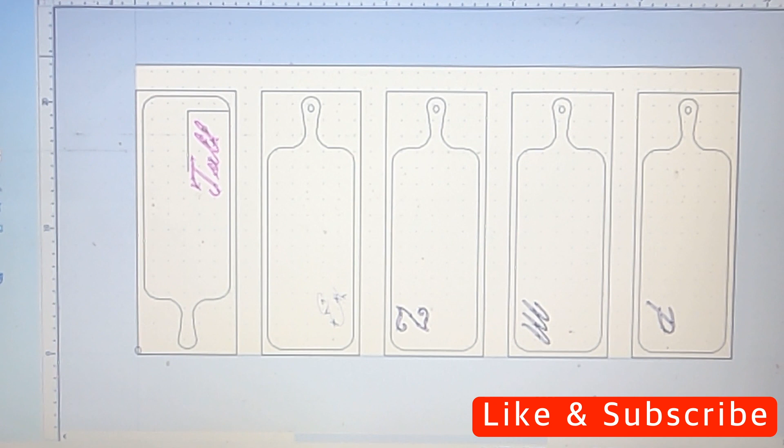If you look here, this is from a previous video, I'll have it linked down below, where I did charcuterie boards. So here's board here, here, here, here, and here, got all the different boards. Whenever I did that, I put inlays on them. I had them all cut out at once, so I didn't have to put a board down, put an inlay.

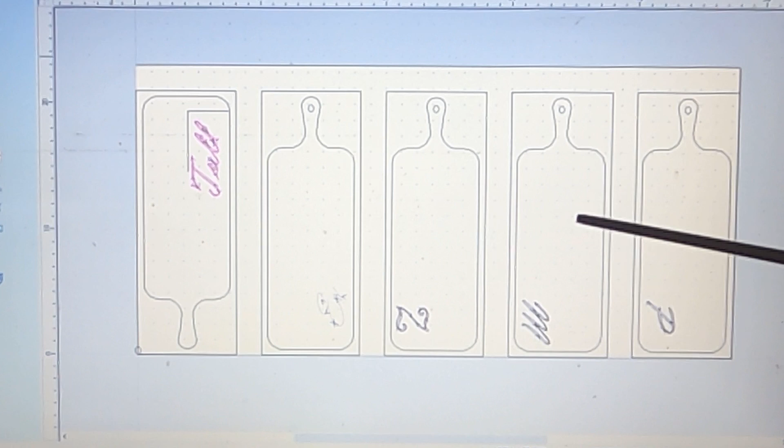So I was going to show you, hopefully quickly today, how to do this production style and how to get these out a bit quicker. Because I know a lot of people do like things customized, but you don't want to spend tons of time on it. Setting up your machine is your most time-intensive part. You want that thing to run while you're doing something else.

I'm going to walk you through the steps that I use to get a board looking like this. This is my charcuterie board here. It's got the inlay, nice flush, looks really nice and clean. Yeah, did it all at once and got it all done. So here, I'll walk you through the steps.

With this part here that we cut out, I call these the negatives, since you're cutting out the part, and the piece that we're going to inset, I call those the positives. So from here on out, I'll call them that.

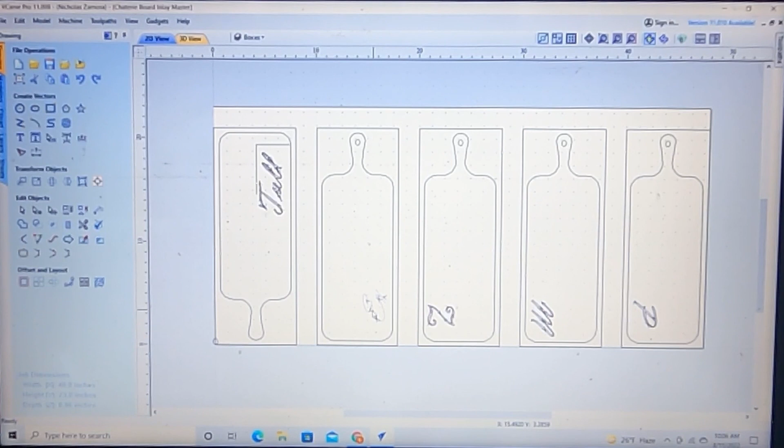Whenever we do this, I'm just going to do these first two here because I don't have all the different boards. I'm just going to show you how you do it. If I show you how to do two, you can continue on the process. This word's already done, I actually did that for one of my relatives, but I'm going to walk through how to make this part here and then make the negative next.

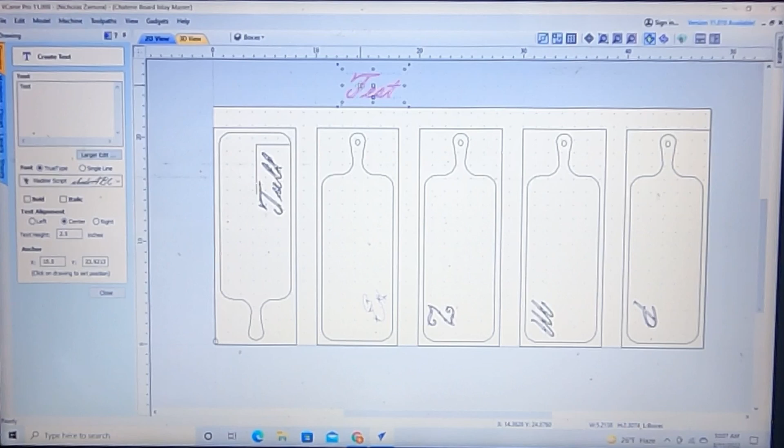First, let's go over here to the text editor and add a text box. So here we'll go to the text editor and we'll just do 'test'. What I did with these is if it was too long of a name, I just didn't put the whole thing, I just put their first letter. With this, I don't think test would be too bad, it's only 4, but once you got over 5 it was just a lot of material to eat up and clean up and everything else. So here we go, we got test, click close, zoom in.

What I like to do is connect these and not have them separate like that, but this one, I don't know if the T will connect very well, so I'll leave this one separate. But in here, you're going to have to clean these up. So if you click this, and then you click the little checkbox over here for the Vcarve mode right there, and then I'm going to search, and it's not showing anything, but we can clearly see that there's problems right here.

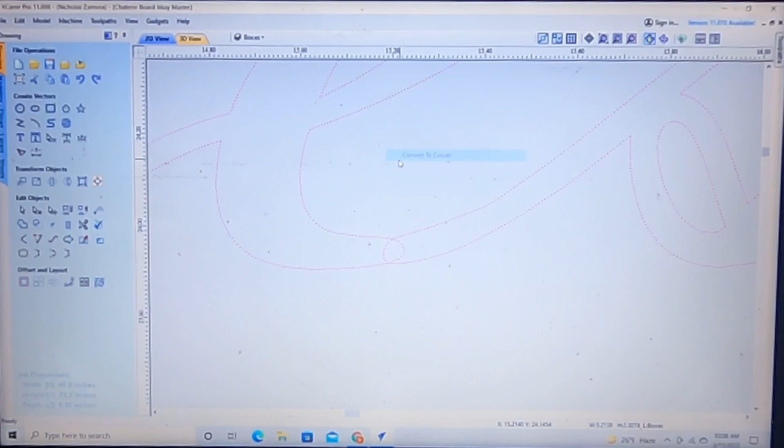First, we're going to right-click on this, convert to curves, because you cannot edit it when it's text. So before you convert it to curves, make sure that this is the right overall size that you want, width, height, and whatnot. So I'm pretty content with all that. Now we're going to come on down here, we converted it to curves, so you see how they're all different. And even the E is separated out, so this is like one line all the way across, and it doesn't even take the inner part.

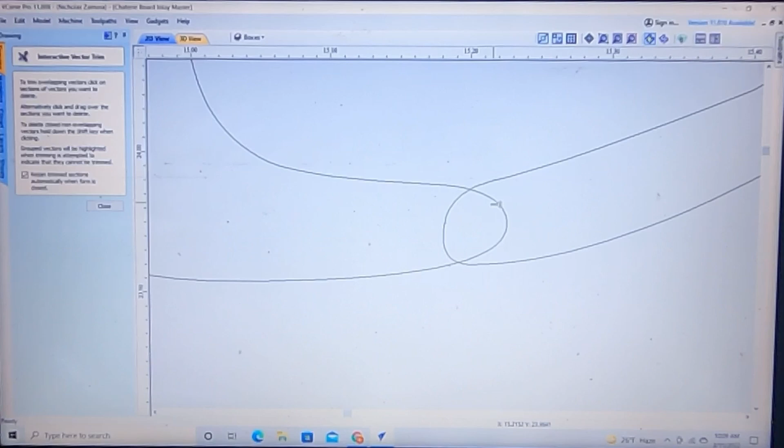So don't move anything, but go down here, then click your scissors, make sure you click the rejoin. And we can cut this. If you're too far out, sometimes it doesn't work. And then we can clean this up here too. Cut. So now they are connected, it all looks pretty good.

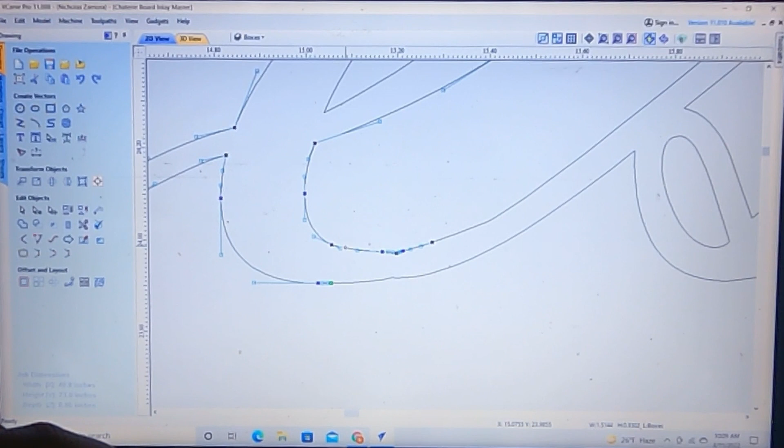However, you see that bump right there? Most people would never notice it, but it would annoy the crap out of me. So I'll get out of the scissors, then I will click on this, press N. When I press N, we go into node mode, so you see how the nodes are all right here? Then probably right about here, I'll press C as in cat. Then go over here, press C. Right about here, I'll press C. And right here, I'll press C as well. Okay, now when we press N again, it gets me out of node mode.

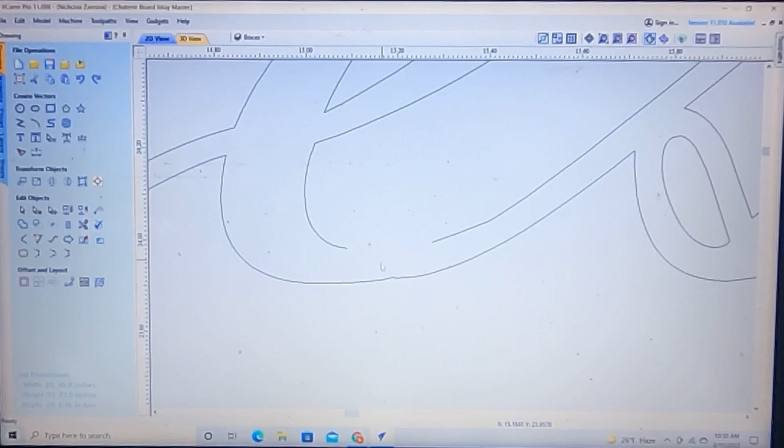Now check this out. This is all still the same, all still one piece here, but now this is a separate piece here. So now these are 3 separate pieces. Well, even more, because this one down here.

The C is for cut, so when I press delete here, I'll press delete here. Now let me highlight that, press shift. Now click this. I'll go over here on this side, and I'm going to do it with a smooth curve, and this will rejoin. That's pretty smooth. And then I'll do it again. So that smoothed that out a bit.

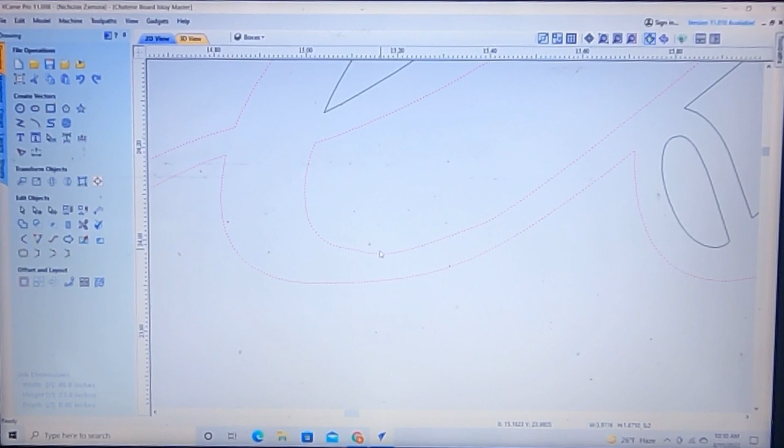It didn't do as well as I'd hoped, so I can press N again as well. Now I can grab this guy here, so this is the point of which it's pivoting from. This is the magnitude and direction. So I can move that up, and you see how it's moving that curve.

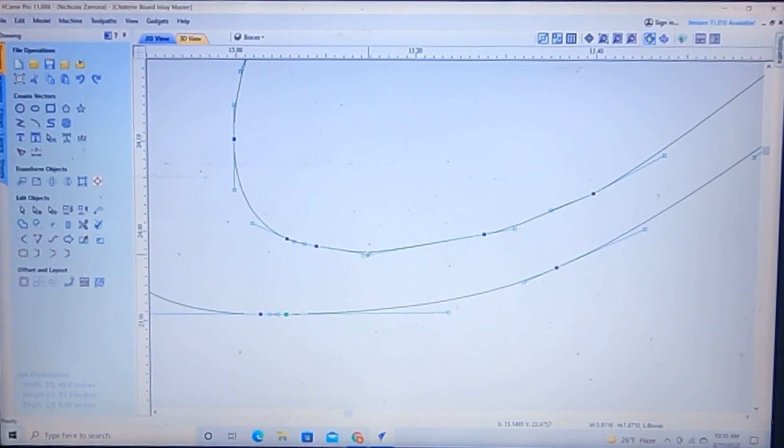I don't like this curve being too small, because the smaller it is using your V-bit, the less material is going to be there that it's cutting. So try to make that look natural, but also not too small. And then right here, if you zoom out, I might even kind of round that off.

So let's go here, press N for node mode, press C here. Oh, I was already in node mode. Press N again, press C there, press C there, press node mode again, N.

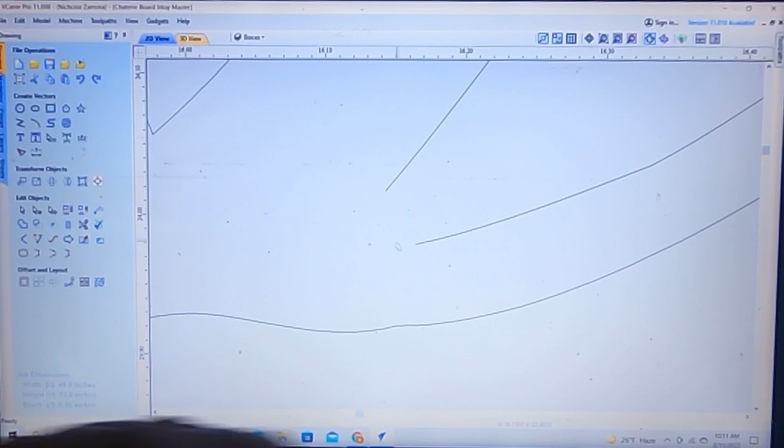We'll delete this. And then right here, we're going to click over on this side right here. We're going to close it with a smooth. So you see how that looks now? Looks a bit more natural.

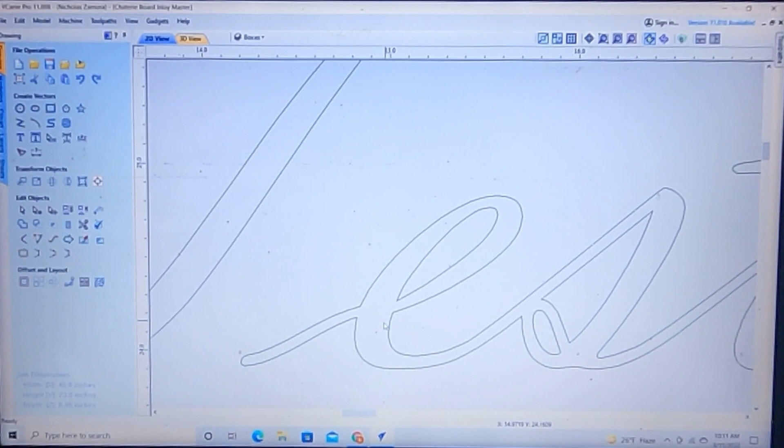This won't be a problem. It doesn't go too thin. But also if you use end mills to cut things and stuff like that, these are very handy tips to use, where you go into node mode, and then what you could do is, like, say you're using a 1/4 inch end mill, or say you're using an 1/8 inch, so 0.125.

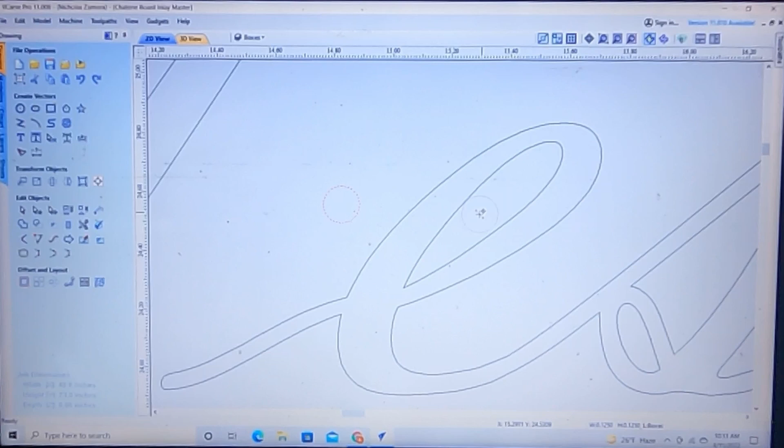See 0.125 up there is diameter. I'll click right here, that's 0.125. Then you can drag this through and see where it's actually going to cut, because it can't obviously get into that corner like this. It would only cut down to here, so you can start adjusting your letters so that it can actually cut it. So you know what's being cut, I should say.

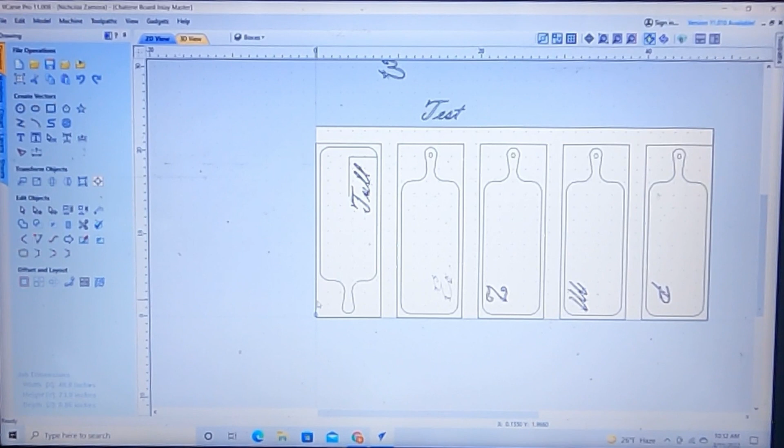Anyways, so we got this guy right. Now before we go much farther, what I do like to do is these boxes here are just representations of the blank boards I'm putting down. So I've joined boards together in the past, if you look at the previous video, and they were this size here on this outer. And then I place them, if I zoom in, see it's 0 inches right up here. And then the edge of this one's 10 inches, that one's 20 over here.

And that one starts at 30, this one starts at 40, so I am using the Journeyman. You can do this on any of them.

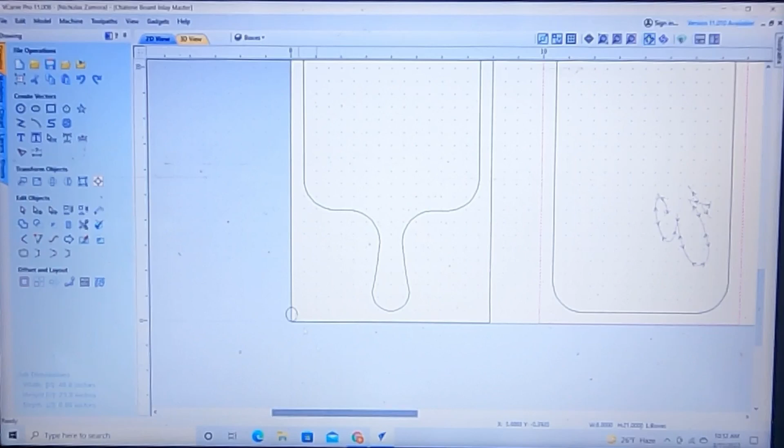But what I wanted to do is I have a strip of different colored wood on almost all of mine right here, and I wanted this to be all one color of wood, because I'm going to make this darker and this lighter here, this lighter strip that goes from there to there.

And I wanted them to all be pretty much the same in area, so I copy this in the same area, but I flipped these around mainly because it just looked better on this side, or it worked out better. So when I saw the physical boards in place, I separated these and set them up the way they needed to be. I will paste it over here, so Control V, and that pastes it.

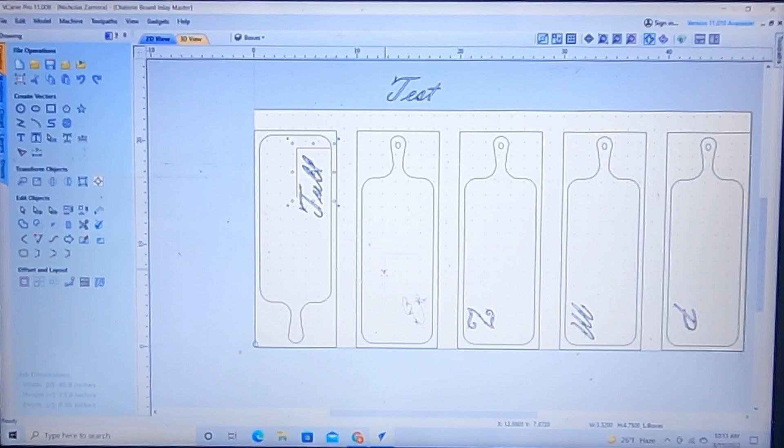We're going to move it, and this is purely for a guide. It doesn't do anything else. We're not using it for anything else. This just gives me a guide to be close to the same area as the other ones.

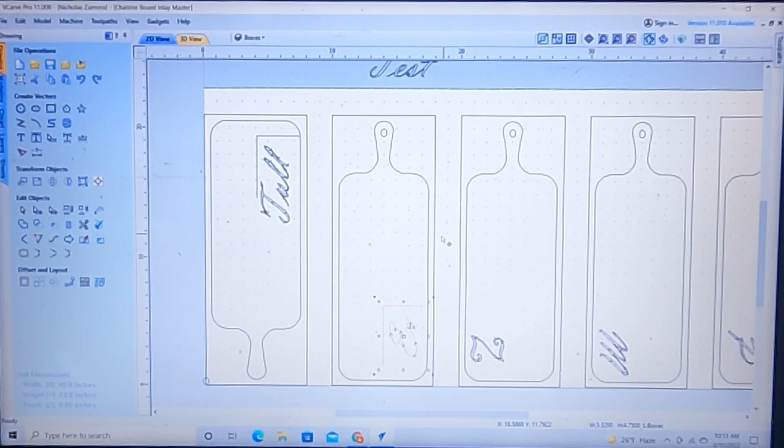I'll press the down arrow. I think my other one isn't, yeah, it's still up a bit, so that'd be good enough. It's just a little guide just to show me the general area where I should put it. That was a hangover from a different tool path I had done. I had done this video before, but I didn't like it, so I'm redoing it now.

Anyways, we're going to highlight all this, and we are going to group objects. So now when we move it, double click it, it moves all as one, and you don't have to highlight the whole thing.

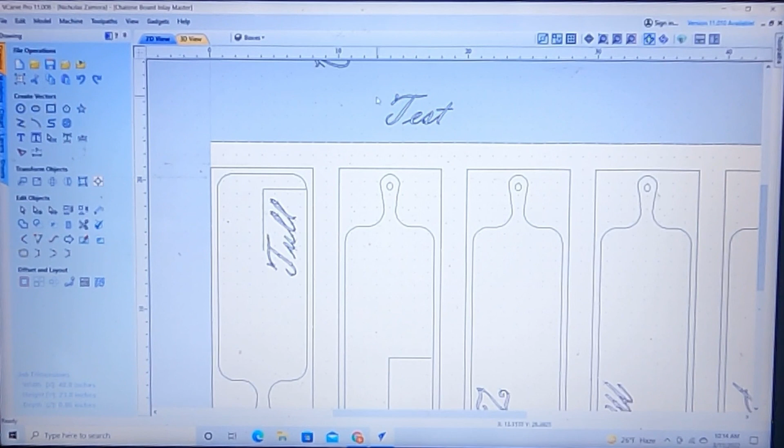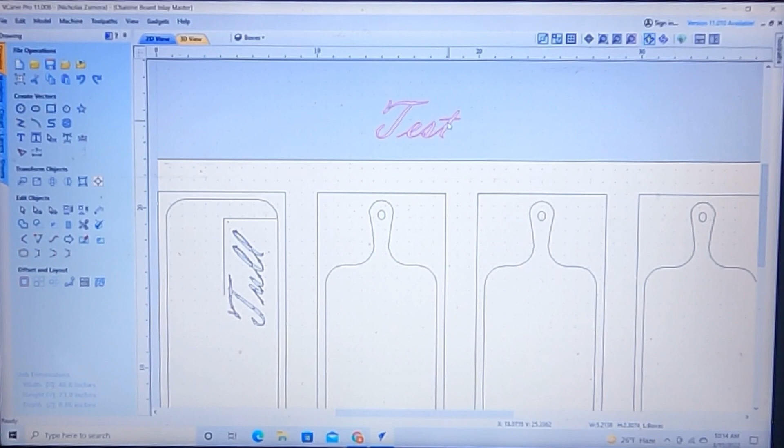Now with this guy here, make sure you got it the exact way that you want it. Any spacing, anything else you want to do, you need to do it now before you go past this step. There is a toolpath over here for inlays itself. I haven't used it. My process here has been working just fine for me, and I get full control over everything. If you want to use that, there's other videos available for that. This one is more hands-on, but you get more control over it.

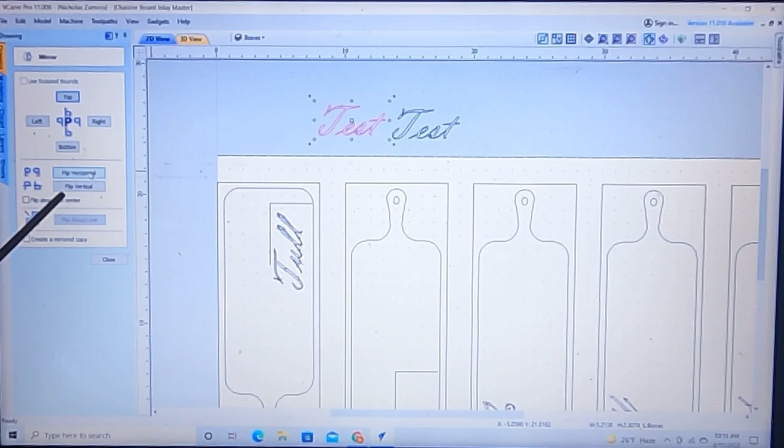So with this guy here, we're going to copy it and paste it. Now we have two of them right there. Over here, we're going to mirror the selected objects, and we need to flip them horizontal, not vertical. Horizontal right there.

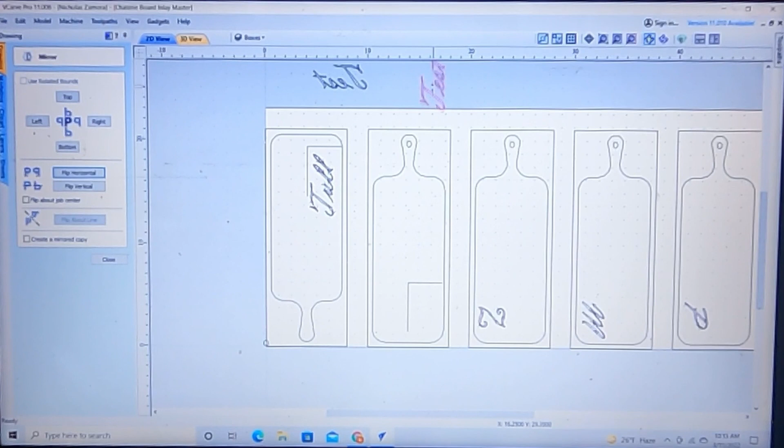Okay, now we're not going to mess around with that guy. That is going to be on our positive. So on our negative, we're going to take this guy, rotate him, and while you have this held down, if you press 9, 0, and then enter, it will move it automatically 90. You got to be holding the mouse the whole time. So you see with our guide, it gets kind of close to the edge. I don't like that because I do round the edges off. We'll move this up.

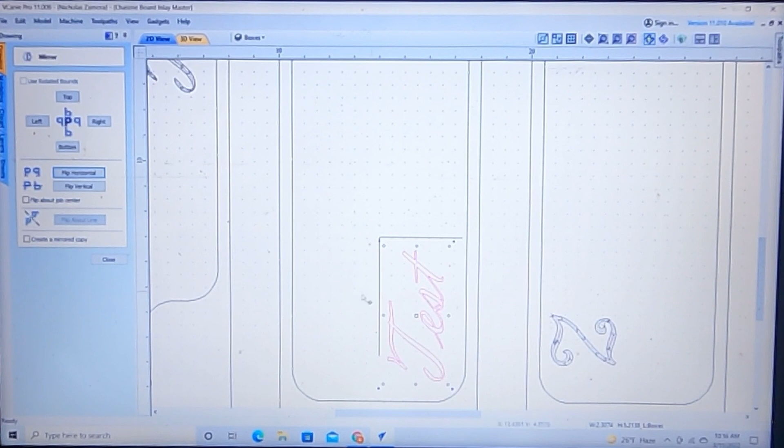And what you can do is measure your blank here and see if this is all going to line up, and make sure, like I think my other stripe starts somewhere right around here in this area. So we got the test right there. I might move it up just a hair.

So that's good. Close out of the mirror. Now with this guy, so this is my boxes right there.

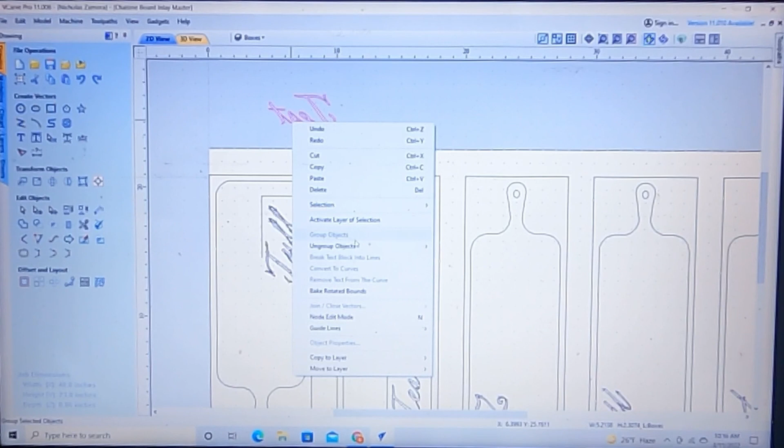I'm going to create a new layer. It's going to be the positives, P-O-S-I-T-I-V-E-S. And then the thing I really hate is if you click out, it doesn't work, so you got to click right here. I'm going to turn the light bulb off on it because I don't want to see it yet. I want to be on this layer. But with the positives, I'm going to copy to layer, positives.

And then with this one here, Control copy. I'm going to do this one as well. 90, enter. 180, enter.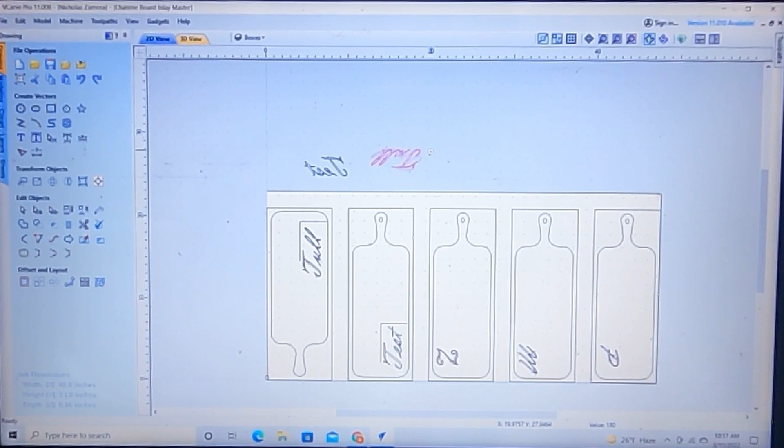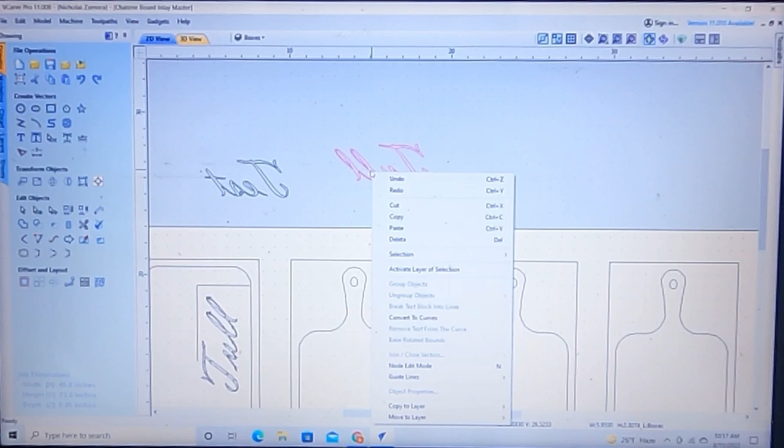So this guy here, need to do the same, flipping over. This guy here, click this, and we're going to flip it horizontal. We'll close. And actually I could just click move to the layer, but I'll just copy to layer, positives.

All right, so for the tool paths for these, I'm not going to do these ones since I won't set up boards for them, but this is the general process. If you can do 2, you can do more.

Over here I got the Vcarve toolpath, and it goes from 0 to 0.15 inches. Flat depth, you do need that. I prefer a 60-degree V-bit. The larger the degrees are, the larger your piece needs to be as far as what you're cutting out. You can use a 30, a 20, a 10 if you want. 60 seems to be good for me for most of the things that I do.

So I'm using the 60-degree, and you don't need clearance tools for this. If this was much bigger and you're using a 60, maybe. For the other tool path you will, but not for this one. So I named it Vcarve Inlay, 60-degree V-bit. I'm going to click off of those, click on this one, hold shift, click on this one, so it's only going to cut these 2. And I'll go to calculate.

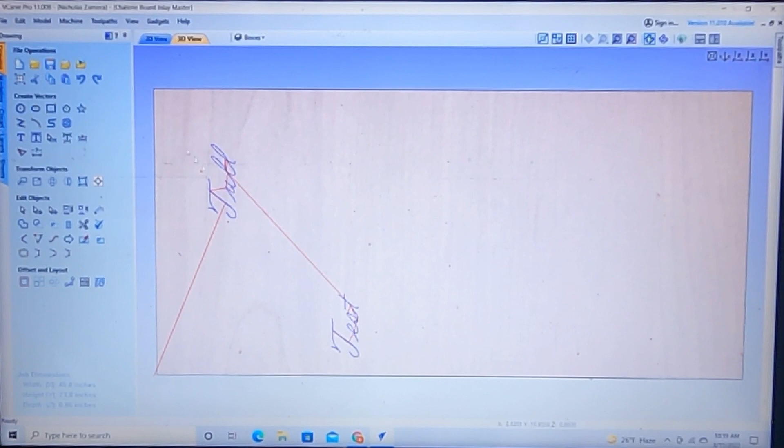So it shows the 2 names there. See, the program doesn't know, it just thinks this is all one board. Over here, I just put these boxes in there, the program has no idea. So as long as you follow this when you set everything up, you'll be just fine. It will go to the right spot. You zero down here, put your boards on there on those markings, and then run it.

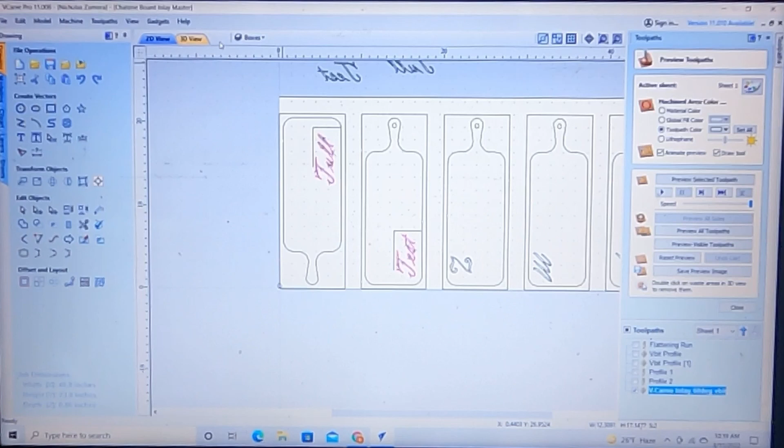So we got our first tool path for the 60-degree V-bit. Ignore these other ones here. Now we're going to go to the positives. Light that one up, turn that off. So now we're only looking at positives and what is in positives. I'll get rid of this tool path so we don't see it. So for these 2 guys here, we need to cut out the part that is going to be inlaid.

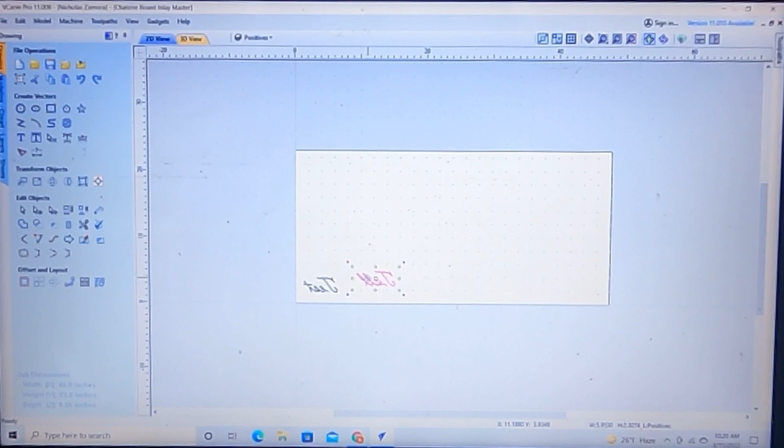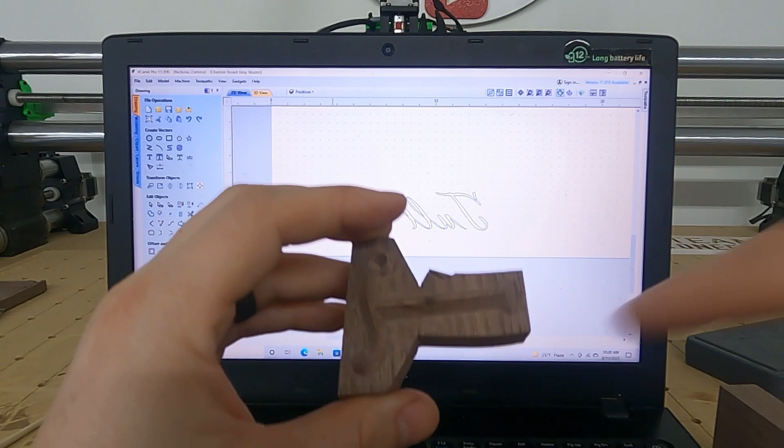I'm going to turn on the light here for a second and we'll measure the actual donor board we're going to use for this. If you go to a hardwood supplier, you're going to get a piece of wood like this, usually 8/4, maybe more. Now if you cut an inlay out of it, you can, but the only usable part is up here, and then once you're done there'll still be this all sitting there plus all this wood, and I don't like to waste all of that. There's many ways to skin this cat.

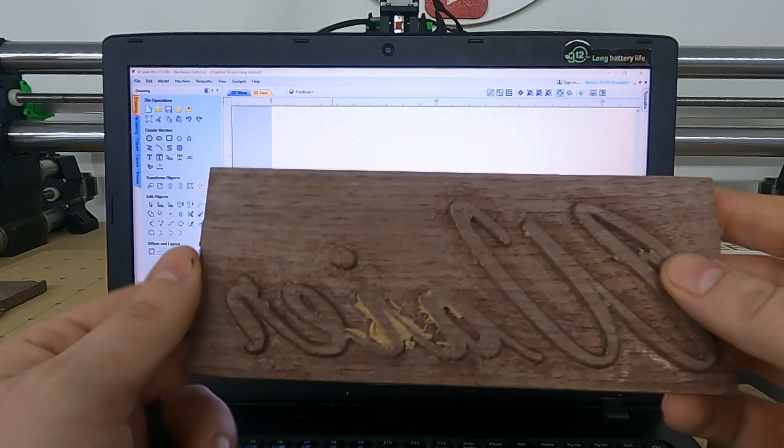It'll end up looking like this when it's all cut off, so here's another board I did. And then when I cut it flat, that was the part still sticking out, so this was set on the board, it's cut. So that's not much waste, but when you look at this, from there to there, look how much extra you got.

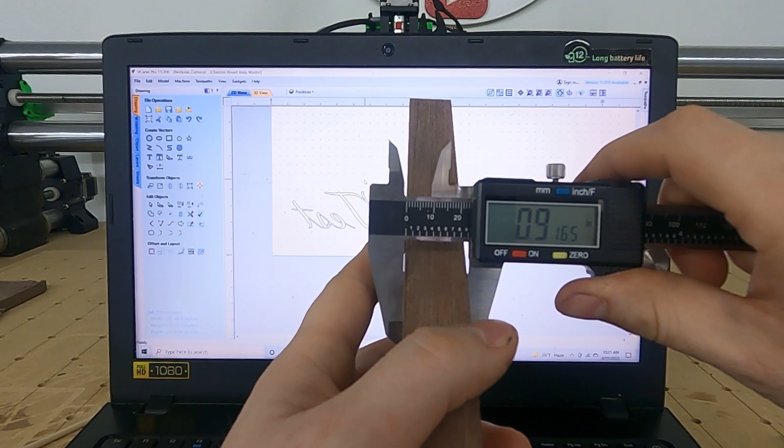What I found is I can make this go twice as far if I take this size board right here, which is 4/4, a little over. They vary whenever you get them from a hardwood supplier. You're paying for 1 inch thick no matter what, it's just they pre-planed it for you or whatnot.

And then what I will do is cut it in half like so, and then I can get twice as many out of it. So this guy right here, if I go much thinner than this, it doesn't work too well. So it works out great having it in half.

So we're at almost 4.8, 0.48, 0.49. So I'll use that. Well, this piece of board here, we need to model in here and then cut these out of it.

Okay, with this board here, the area is 10 3/4 by 3 3/4, roundabout. I'm not going to go close to the edges, so let's go over here, create a box. 10.75 by 3.75.

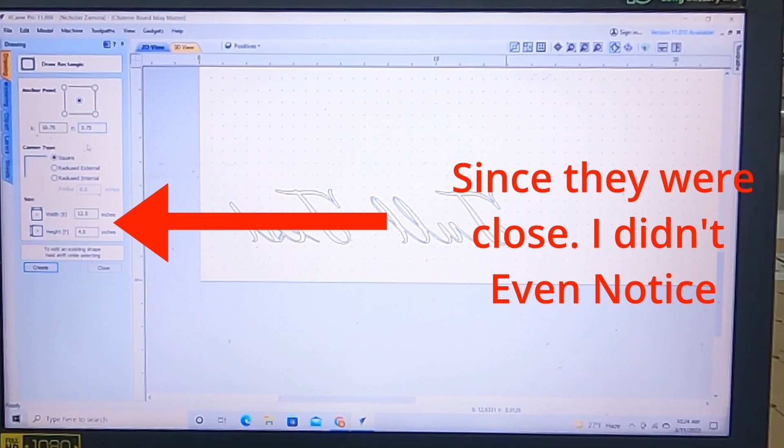So this box here is only for a guide as well. The program has no idea about it, I'm not going to really use it for too much. I'll show you what it will end up doing. But if you notice, there was a screw hole in the top left and in the bottom right, depending on which way I put this.

But the other part is with these pieces, you need to make sure they're completely flat. Definitely do that. Do not change the scale or anything like that with these, or you're going to be in deep trouble. This is also with the grain pattern, so we know the grain is going to be going this way. If you want to do anything, you spin these around to get the grain patterns that you want. So now's the time to do it.

You can get these kind of close to each other too, but not too close. So like that, I'll move this guy over a little bit.

So when we set up this toolpath to carve out our positive for the inlay, you need some sort of bounds. It's the exact opposite of a V-carve. With a V-carve, the V-bit just chills out right inside here, nothing else happens. With this part, it's going to use a clearing tool to clear out all this good stuff here, and then right on the edges it's going to use a V-bit.

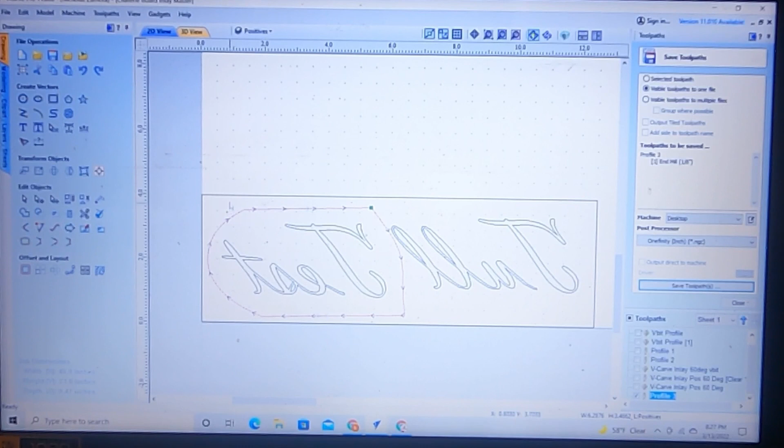You have to have some sort of bounds or else it's going to just go on forever. We could use this donor piece of material bounds here, which I screwed up earlier, and you'll see that it didn't exactly work out, so I ended up just cutting this test piece here. But you need some sort of a bounds.

Usually what I'll do is select like this here and then do an offset, like 0.75 inches, and offset it. That can work. Control Z. There's many ways to skin this cat.

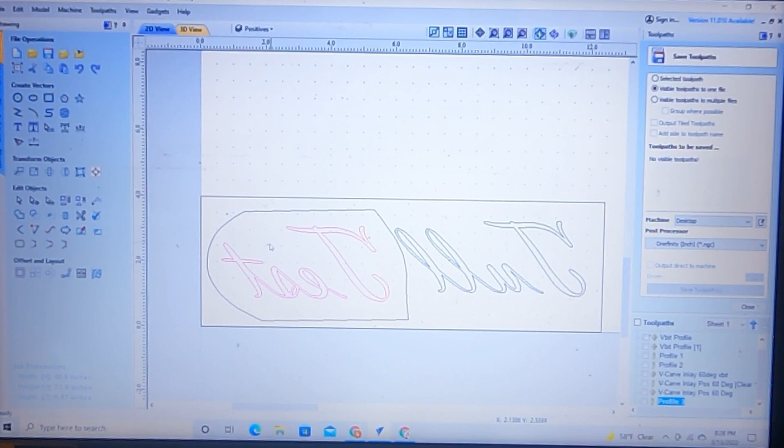The thing you don't want to do is come too close, like over here. Right there is going to be a screw, and sometimes people put a screw here and here too. So what you don't want to do is end up hitting those.

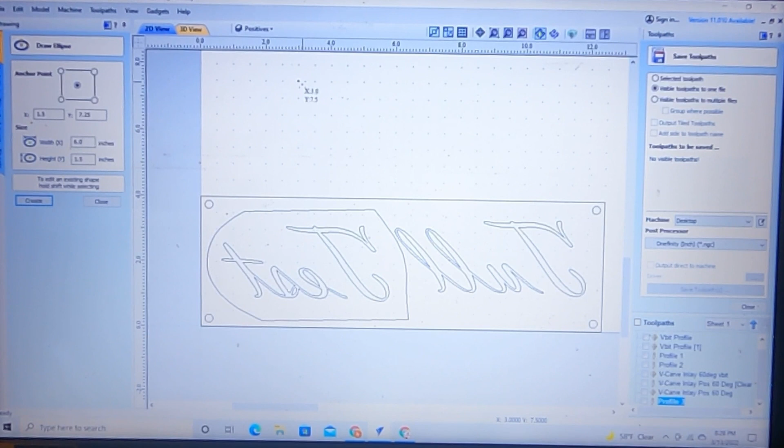So draw some sort of a shape to give you a full bounds, and that's a whole bounds there. To do it in a regular shape like that, you can do something like an oval, drawn here, and then put like a line. So you want to make it as efficient as possible.

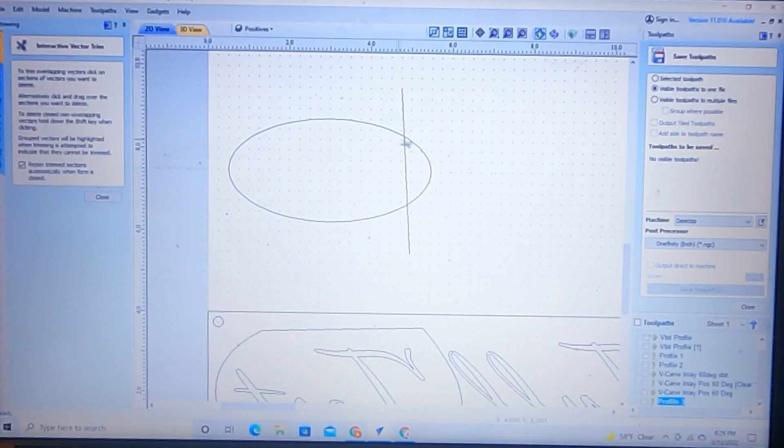Press spacebar, come over here, click the scissors, make sure this is clicked right here. It says rejoin trim sections automatically when it's closed, so basically it'll make it all complete. So click this and this and this. If you check that out, see it all lit up at once, meaning it's all one piece, it's all one vector. You can do anything like that that you want to do.

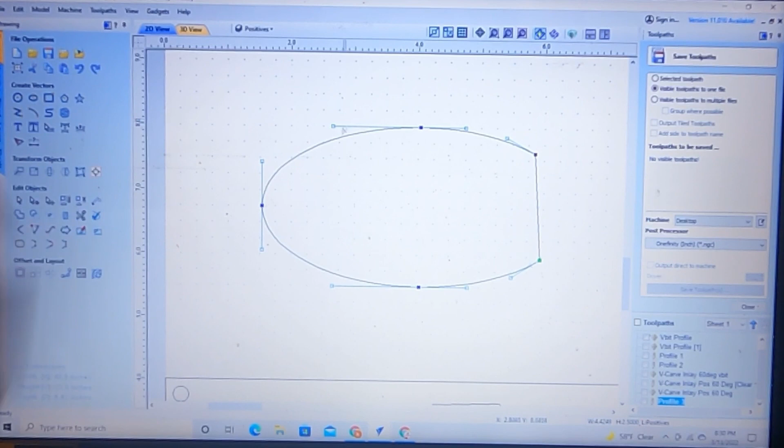Another technique I like to use sometimes is to click on there, press N for node, and then press C for cut, C for cut, and then get out of that, escape, then delete that, say you had something hanging out up there.

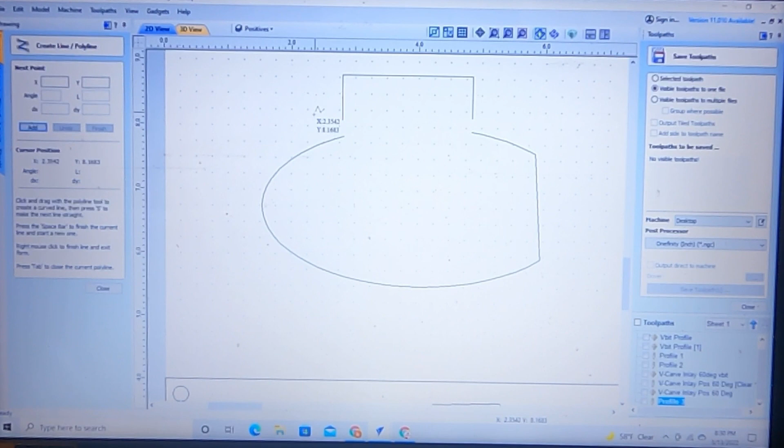You could put a line here, a line there around it, and there. You don't want to come too close to it, and I'll show you why. Click that, hold shift, then click a straight line. Over here on the straight side, you can do straight or curved, and now you see it's all one piece, clicked it twice.

So you can do that. That's how I came up with this shape here, something like that. I just don't want to come up too close to these.

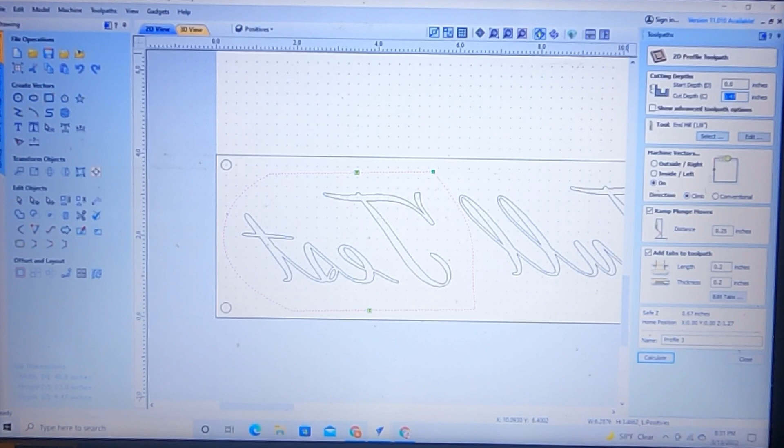Once you're done, you'll see that I made another toolpath, and I used a profile toolpath. Then make sure the cut depth, I'll put Z equals, and it automatically takes it from your model position and where it says your depth of material, it'll put it right there. Then you want to ramp your plunge moves, add tabs, calculate.

So in here, to make the inlay - let's not look at the profile - you see how that's all lit up there? We got a clear and we got a regular inlay, just the regular V-bit. So we'll go into this guy and I'll show you how I made it.

With this guy here, what you're going to do is set it to 0.1 up here, and then 0.1 flat depth, 60-degree V-bit. Whatever V-bit you used previously, you need to have it selected here.

With this path especially, you're going to need a clearance tool because you don't want your V-bit to clear out literally everything. I use an 1/8 inch end mill because it can get in real close in here. And then ramp them.

Usually your bit's diameter works. I just do 1/4 inch because it doesn't take that much longer.

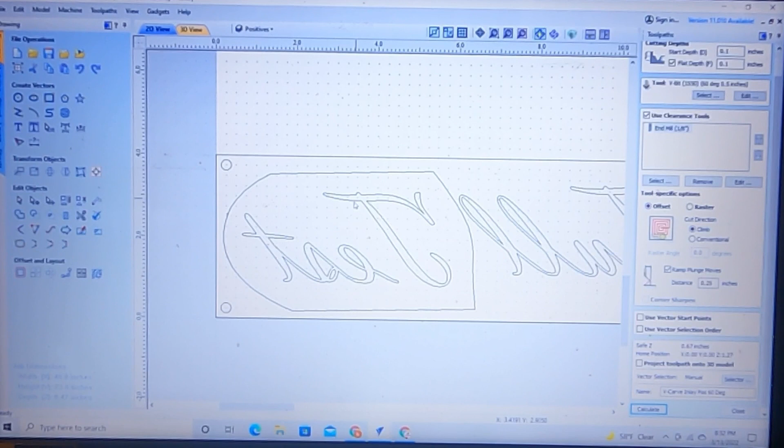What you need to do is select this guy and this, and what you'll notice later on when you see the video of this actually being cut out, I made this box incorrectly, so the box is really coming to here, so I end up really only cutting this guy out - so you kind of see into the future. A big old screw up I made.

So anyways, select those two, and then you click calculate, and also name it. So: Vcarve Inlay, positive 60-degree V-bit. And I'll click calculate.

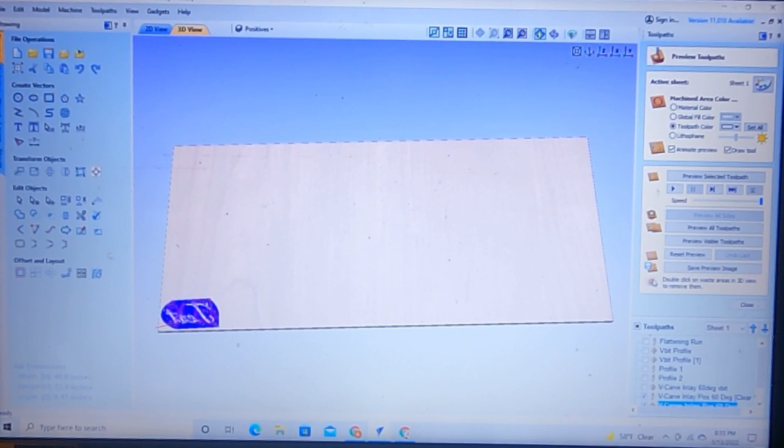So if we look at this guy over here, you can see, if we look at these toolpaths, let's get rid of the V-bit itself - see, the 1/8 inch end mill will do all of this. The bigger you make this, the more time it's going to take.

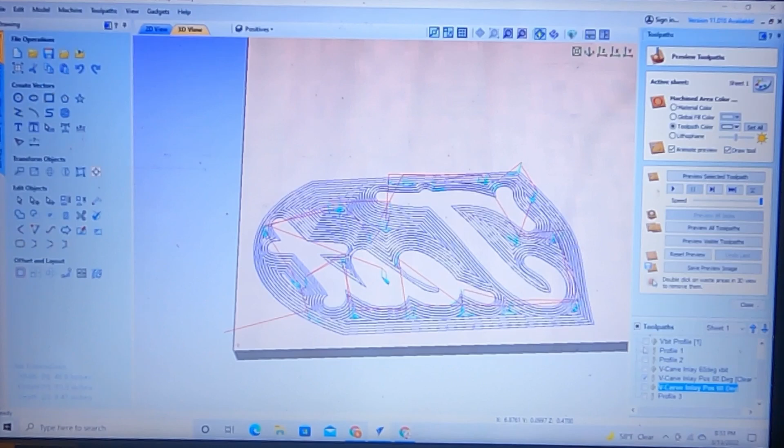Once you're done, you can take this over to your bandsaw and cut this out all the way around, or you can do what I did, which was a profile toolpath - click that and unclick everything else, and then you can see it cutting everything out.

I made sure on the profile tool path that it's set to 'on' instead of inside or outside, because you can pick inside, outside, or on. On seems to work the best in this case. So here's the three tool paths.

Here's the actual V-bit, and with the V-bit you're automatically going to be punching down a tenth of an inch to start, so it's going to be kind of hard on your V-bit. I like to try and make it as little as possible that it'll cut at a time, so I put the pass depth at 0.05, so it comes back twice. This is a thing you can mess with — you can make the same exact tool path but start this at zero. There's a bunch of ways to do it, but this seems to work pretty well for me. Made all that, click OK.

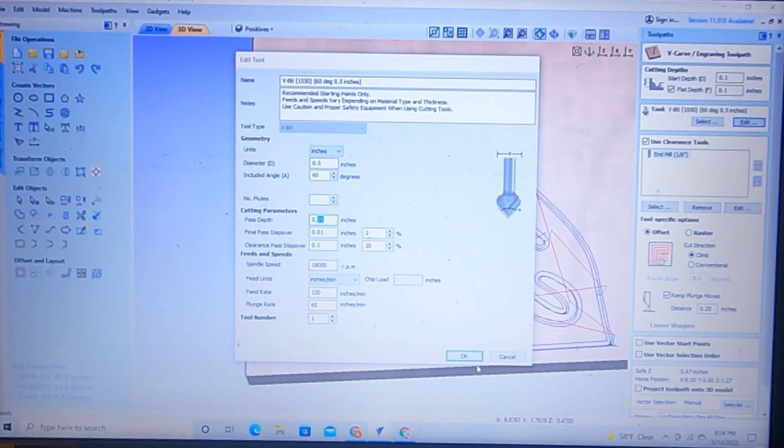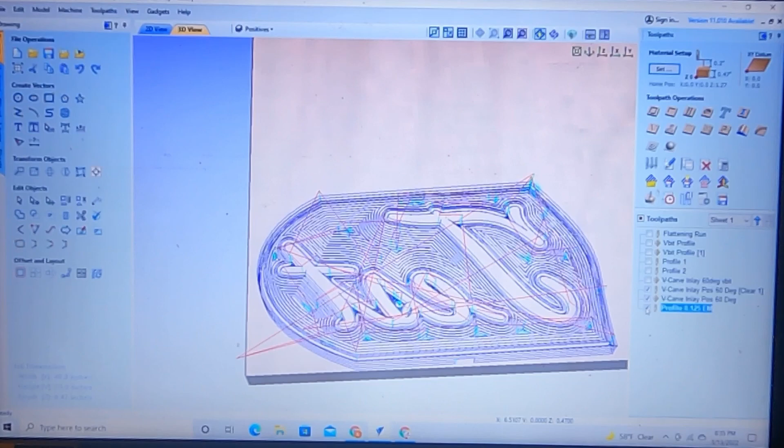Close. So these are ready to go. We'll end up running those, and then I will show you what you do at the very end. These are all different tool paths, and they're all going to be saved differently. I'll name this profile... 0.125 end mill. For the profile tool cut, you can't put slashes in these names, so I just try to go with the actual decimal version of it — profile tool path 0.125 end mill. I'll send these all out separately because they're all going to be done at different times. You've got a couple tool changes, but if you do many of these at once, it makes it a lot easier.

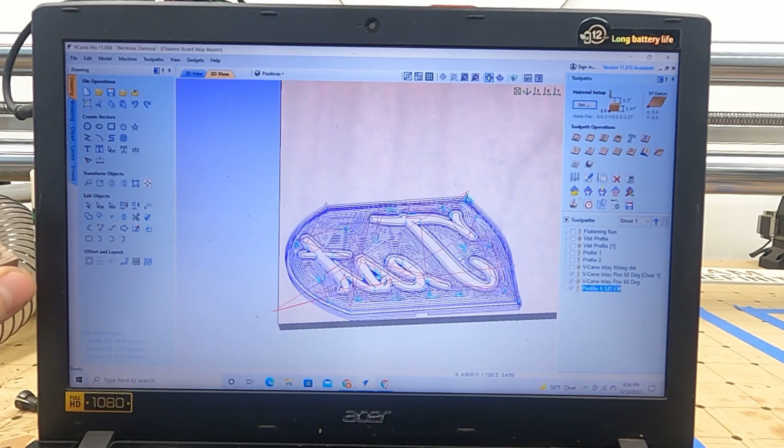Whenever you do this, make sure that you do the V-bit path first and then the end mill, because if not, the V-bit will try to push into the cleared open easy area. So whenever you run these tool paths, I like to run the V-bit first. Obviously you don't want to do your profile first, because if you do your profile, the whole piece is going to want to move around on you. So do everything you can prior to the profile. With this tool path especially, I try to do the V-bit first, because if the V-bit is going through and say this is solid material all the way across, it doesn't have an easy escape — it's not going to want to deflect this way.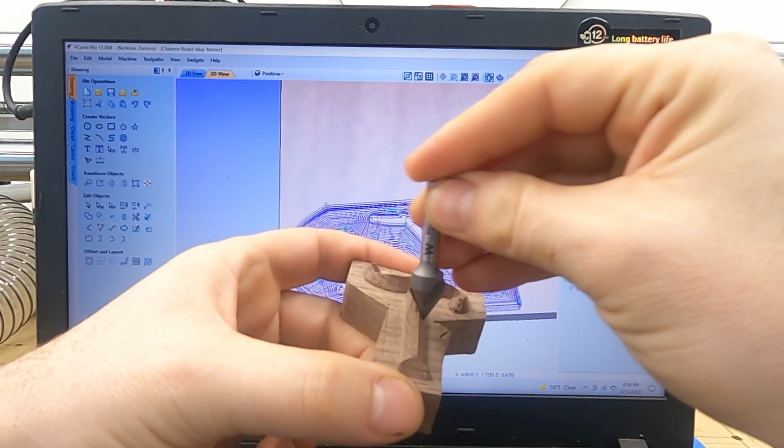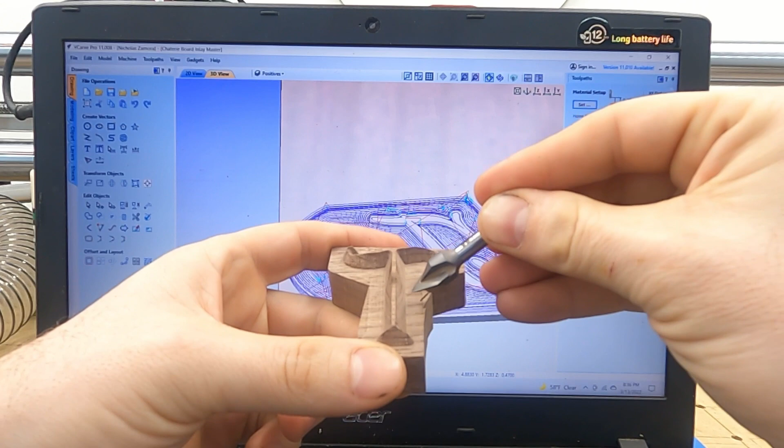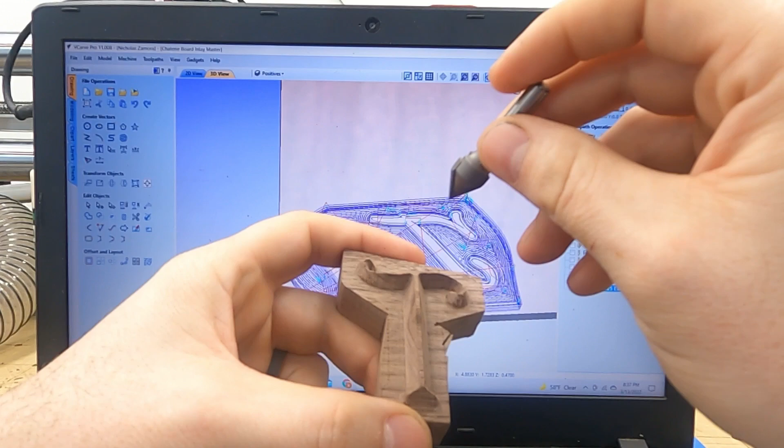But say you ran your 1/8 inch end mill first, and this was this flat block of wood coming straight up, because it hasn't chiseled this out yet — when it comes down, instead of staying tight and crisp, it's going to want to deflect just a bit over here, so you're going to have to run the path again. It's not going to be as nice, and a lot of these nicer details may get pushed out and look like crap. So the order of operations for this would be your V-bit, then your 1/8 inch end mill or whatever end mill you choose to use, and then your profile toolpath. So just a little help for you.

I'm going to show you running those toolpaths, and then I'll show you cutting the board out, and after that it's all up to you.

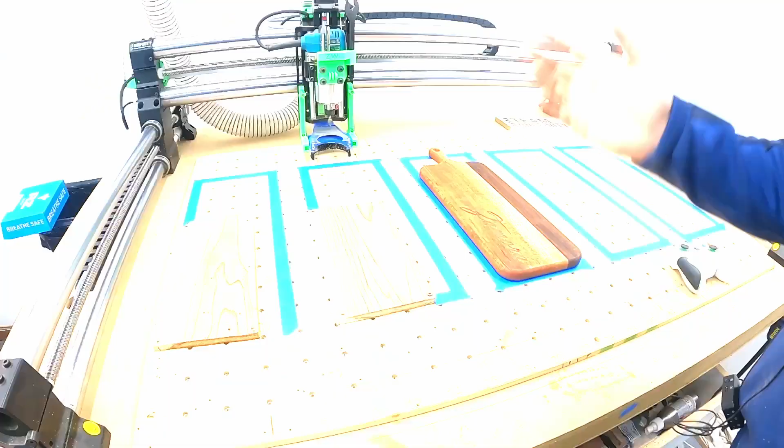Alright, so I ended up going with pieces of cedar here that we'll end up putting an inlay in. So this is going to be cutting out the negative. These guys are stand-ins for my big slabs that I had in here. This is what I ended up cutting out, and then where these blue lines are, that's where the entire piece of wood was that sat there. I just don't have them right now, so I'm using these as a stand-in.

So I'm going to change my tool path based upon this thickness. Where we need to set our zero is right down here at this very far bottom corner — that's incredibly important. Following this line all the way across with all of your boards is very, very important, and these boards being the same thickness is very important too. As far as your starting point, it can be up or down as long as this line doesn't eclipse your entire working area. You can move this up — if you move this up to here, then this guy, the top here, would move up two inches. But you can't move this over unless you get rid of boards over here, depending on where you set your zero. So I'm going to set my zero right here, using a 60-degree V-bit, taking my zero off the material surface, and then start going.

Alright, I took my file, loaded it in, and made sure that all the parameters look correct. I'm going to start this guy up, and we'll go.

Okay, it's all cut. This is just cedar, so it's a little soft, and it's got little fuzzies there. With this, I just try to get one of these little brushes to get the fuzzies out of there.

You can see there, that came out all right. Now we got to cut the other part that's going to inlay inside of there. With this guy here, we got our donor piece. It's flat, as flat as it needs to be, and I've already surfaced it. If you notice right here, this isn't exactly way over there.

So we're going to take our zero right there, because this piece doesn't truthfully matter since we're not using the full 48 inches to the right here. I'll take my new zero right here with this V-bit, run it, and cut all that out. Then we'll switch to the 1/8 inch end mill, take my new material zero off of here, and also input into the program what this new thickness is, since it's different from the last. So update those settings - gonna do that now.

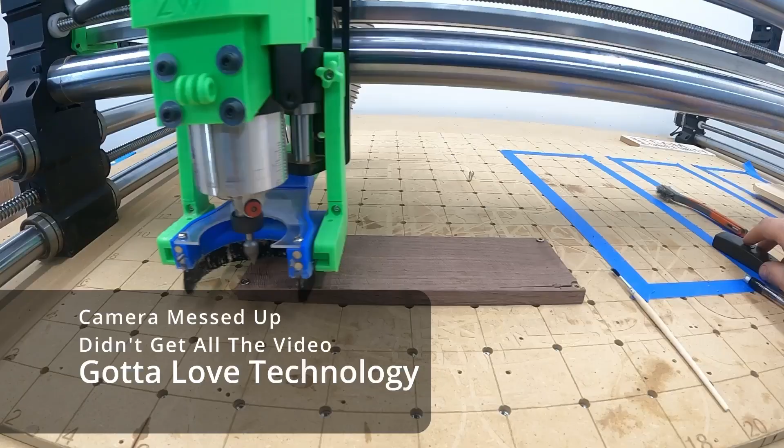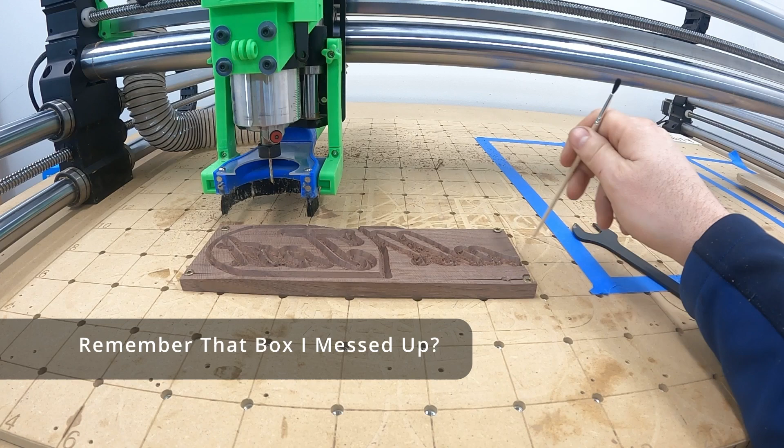The astute among you will realize I've only really cut this one out and this one kind of disappeared. Apparently I'm not that great at math - I think I put in 13 inches, so it was thinking I was way out here, so I wasn't going to get all this. I'll still show you how to do this inlay.

And we'll start cutting. I got the 1/8 inch end mill in there. I did not reset my X and Y zeros, but I did reset the Z. So we'll run, cut this out, and then assemble.